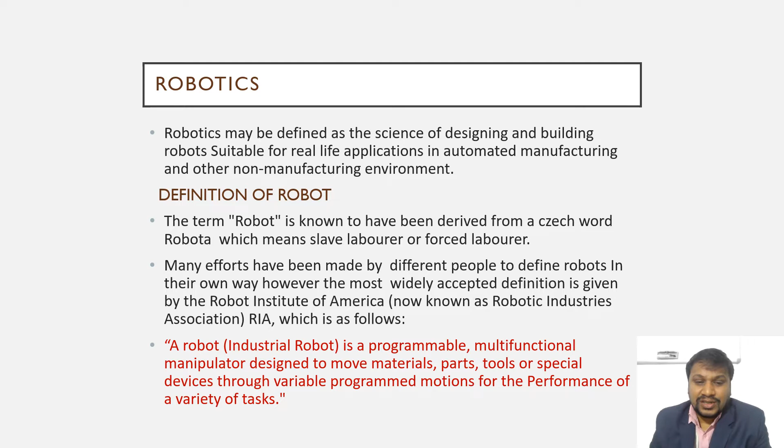Next is the laws of robotics. Basically there are three laws, proposed by Isaac Asimov in 1940. There are three basic laws of robotics proposed by Isaac Asimov in 1940, and the zeroth law was added on later.

So what are the laws of robotics? The first law is very simple. A robot must not harm a human being or, through inaction, allow one to come to harm. Robot must not harm a human being. This is the first law.

Second law: a robot must always obey human beings unless it is in conflict with a higher order law. A robot must always obey human beings unless it is in conflict with a higher order law.

The third one is a robot must protect itself from harm unless that is in conflict with a higher order law. A robot must protect itself from harm unless that is in conflict with a higher order law.

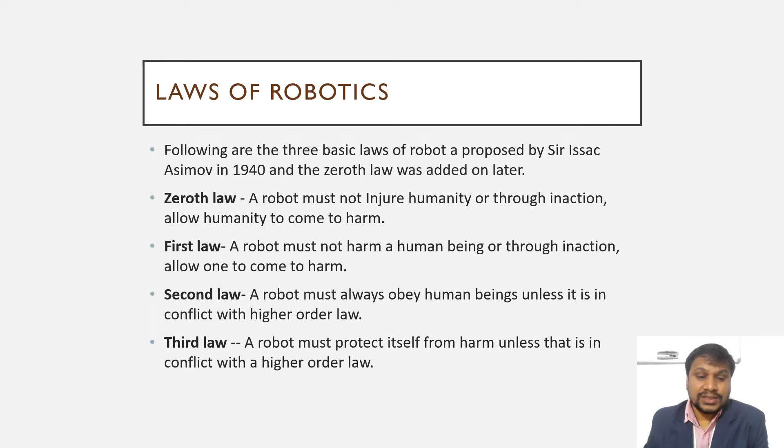Next slide is the objectives of using industrial robots. What are the objectives? The first one is to increase productivity. If we use robots instead of human action, a robot is an automated device, so the productivity of an organization is increased.

To increase productivity, to raise the quality level of products. Products are manufactured automatically by the robot, so the quality level of products is increased.

The third one is to minimize the labor requirement. The labor requirement or labor shortage condition is minimized. To reduce production time: the production process is completed automatically, so production time is reduced.

To improve the existing manufacturing process: robotics, no doubt, is an advanced technology. Quality parts are manufactured with exact timing, accurate parts can be manufactured.

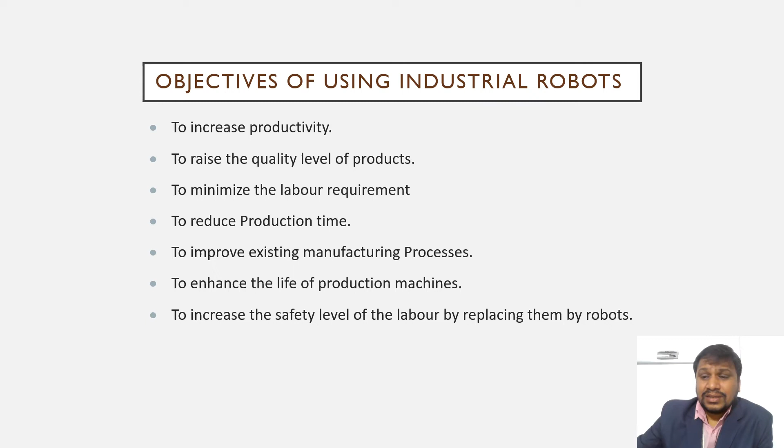Next slide is the functions of a robot. Basically, functions of a robot are categorized into three areas: sensing, decision making, and performing.

First, the robot senses the environment with the device sensor. With the sensor, the robot senses the environment, then the measurable quantity sensed by the sensor from the environment is sent to the servo mechanism.

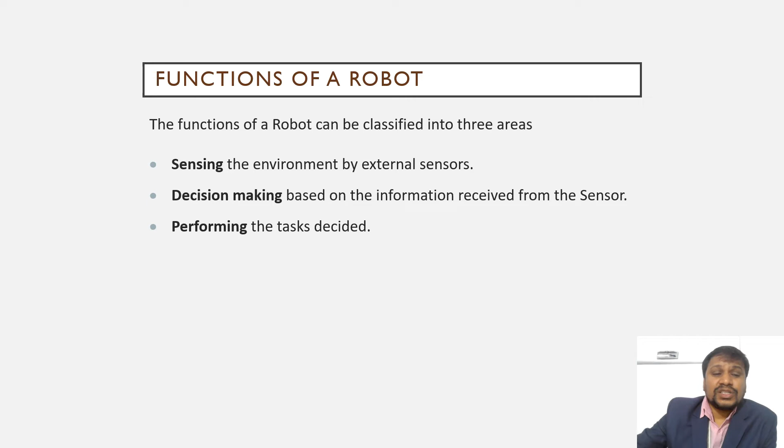Next slide is types of industrial robot. There are different types according to coordinate system or other classifications, but in your syllabus there are basically two types of industrial robot: general purpose robot and special purpose robot.

These general purpose robots are adapted according to the user's requirement, by attaching end effectors or fingers, for operations like part picking, welding, spray painting, etc. For this type of operation, according to requirement, the general purpose robots are adapted. They are basically used for mass production, are cheaper, and the parts are readily available in the market.

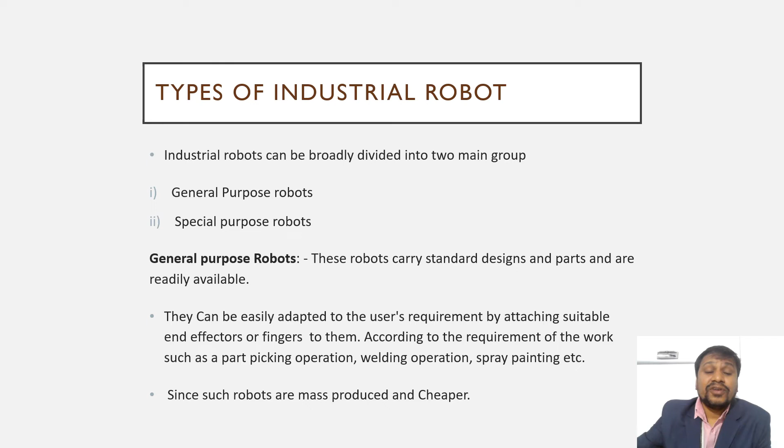Special purpose robots are basically designed for special work. These robots are tailor made to specific job requirements, used for special operations. This type of robot is particularly designed for a specific requirement, a specific task. The design and manufacturing of this type of robot consumes a lot of time, and the parts cannot be readily available in the market. They are costly and cannot be manufactured at mass scale. So these robots are made specifically for a specific type of operation or requirement.

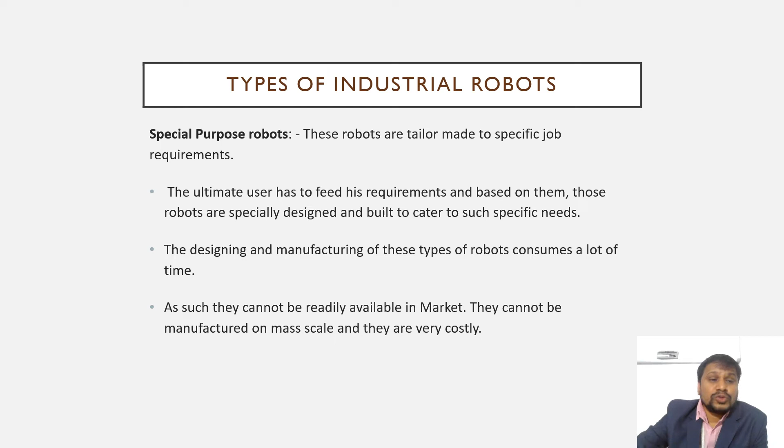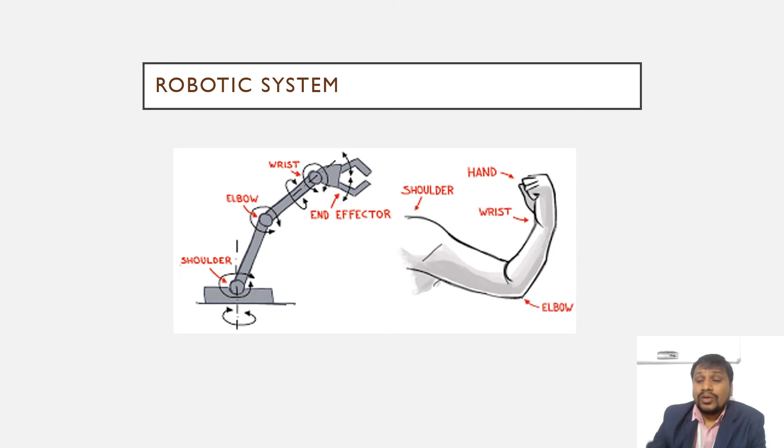So these are the two types of industrial robots, broadly general purpose robot and special purpose robot. Next is the robotic system. A robot is also called an industrial robot, robotic manipulator, or robot arm.

Basically a robot is composed of different types of components. We will discuss the components of a robot. The first one is the base, which can be fixed or mobile. The second one is the manipulator arm.

What is the function of the manipulator arm? The manipulator arm moves with a number of degrees of freedom, 6 degrees of freedom, with a specified reach in the coordinate system to attain a desired workspace. The manipulator arm freely moves with these degrees of freedom.

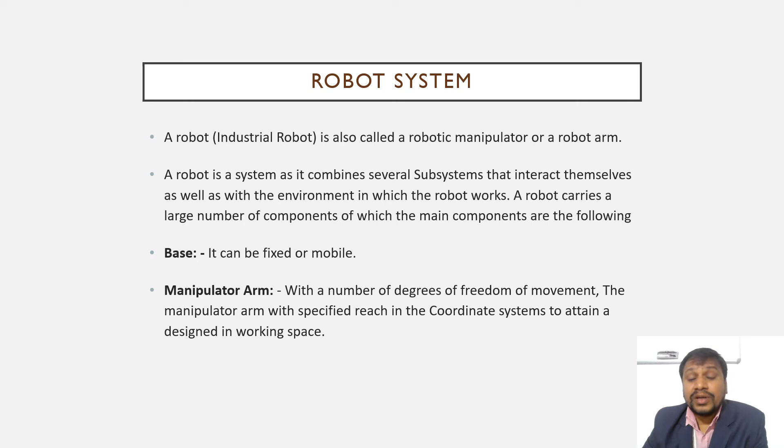Next is the gripper and end effector, which is used for holding the workpiece or tool, depending upon the application of the robot.

Next are the drives, also known as actuators. They move the manipulator arm and end effector to the exact position.

Then is the control system, which controls the robotic actions. A suitable control system, with or without a servo mechanism, sends signals to the drives, and permits storage of programs and data for desired path planning with required speed and good accuracy.

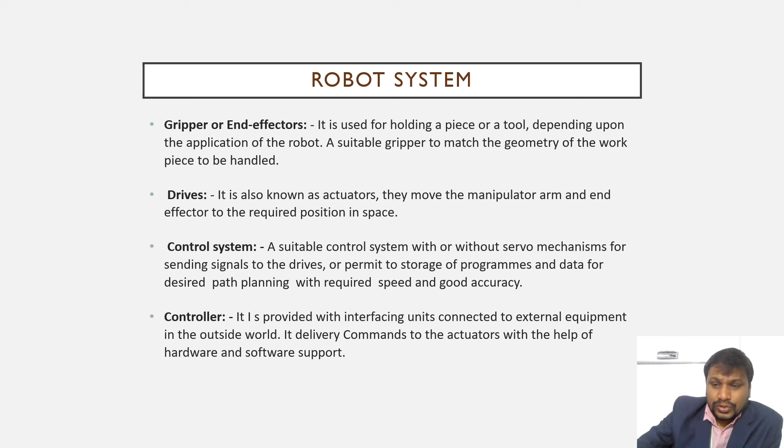Next is the sensor. The sensor senses the environment, the working environment. It performs dual functions: first, to act as a feedback device to direct further action of the manipulator arm and the end effector or gripper.

The sensor receives the signal from the environment and sends it to the control system, acting as a feedback device to direct further action of the manipulator arm and end effector. The second function is to interact with the robot's working environment, sensing it and acting as a feedback device. So there are two functions of the sensor.

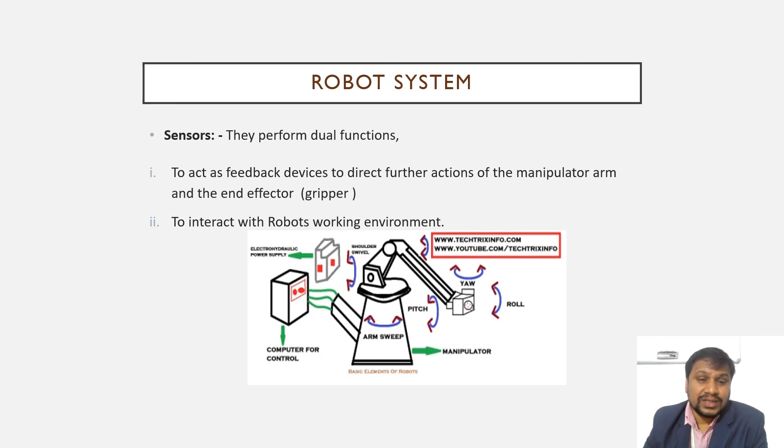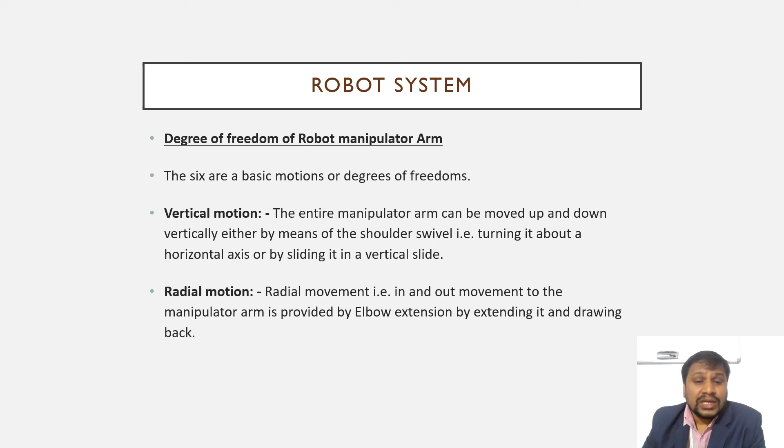Next is degrees of freedom of the robot manipulator arm, which is very important. There are 6 basic motions of degrees of freedom: vertical motion, radial motion, rotary motion, roll motion, pitch motion, and yaw motion. There are 6 degrees of freedom.

Next class we will discuss these degrees of freedom: what is vertical motion, what is horizontal motion, what is rotational motion, what is radial motion, what is pitch motion, what is roll motion, and what is yaw motion.